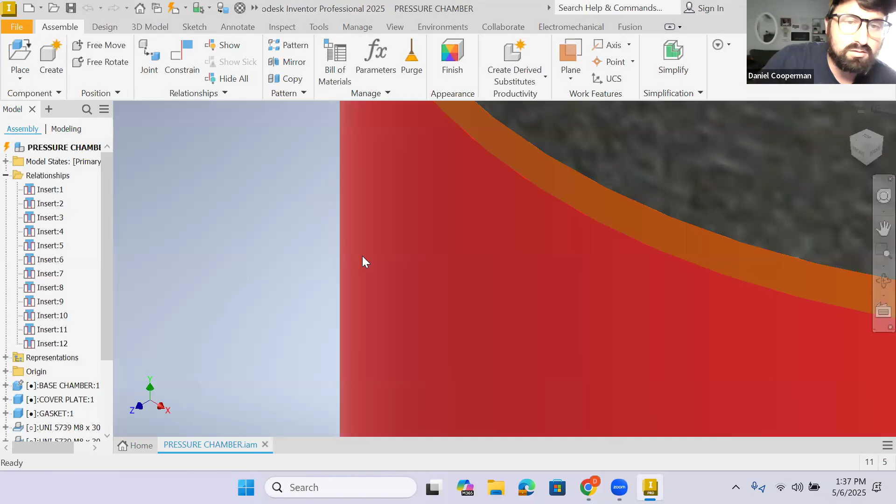Last class we finished the assembly for our pressure chamber. To review from last week, we had our base chamber part, our gasket, and our cover plate. We talked about how to assemble it all together, and how to incorporate parts from the library, inserting these 8 screws. So you should have come to class today with the pressure chamber assembly all put together. Today we're going to bring this to its conclusion and talk about how it needs to be submitted. So we're done with this assembly.

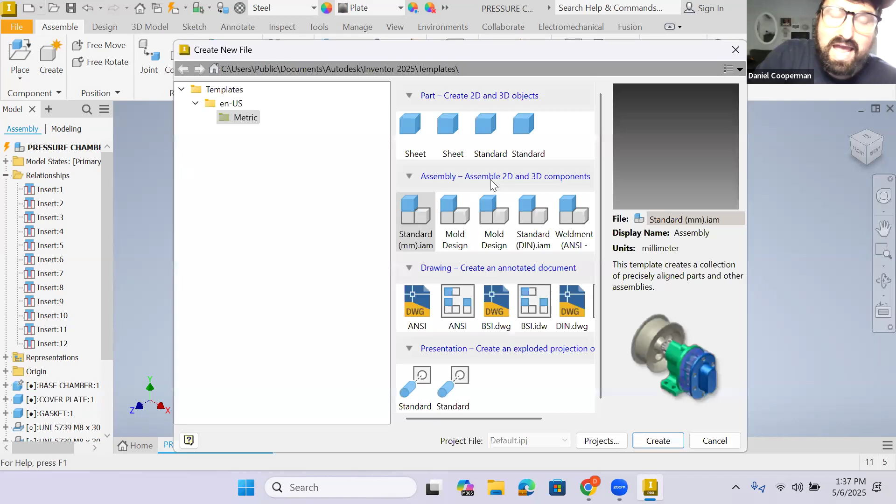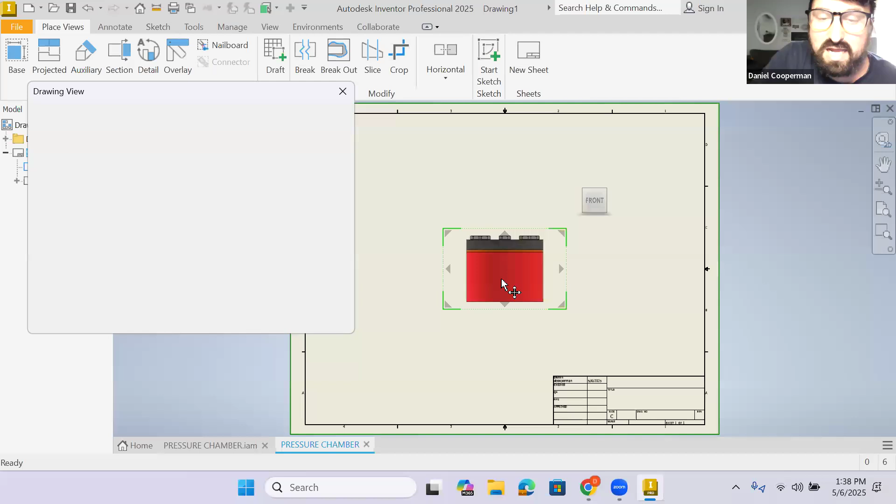Now we're going to work on how we want to have this as a deliverable. Because if I go ahead and make a drawing file, for my cover sheet we're often going to do size C. So I'm going to edit the sheet - size D is the default, make it size C. And then if I incorporate the assembly over here, the problem with an assembly shown this way is you can't really see the gasket, for example. Because everything is put together properly, it's a little hard to make out individual parts to see how they interact in a more physical sense.

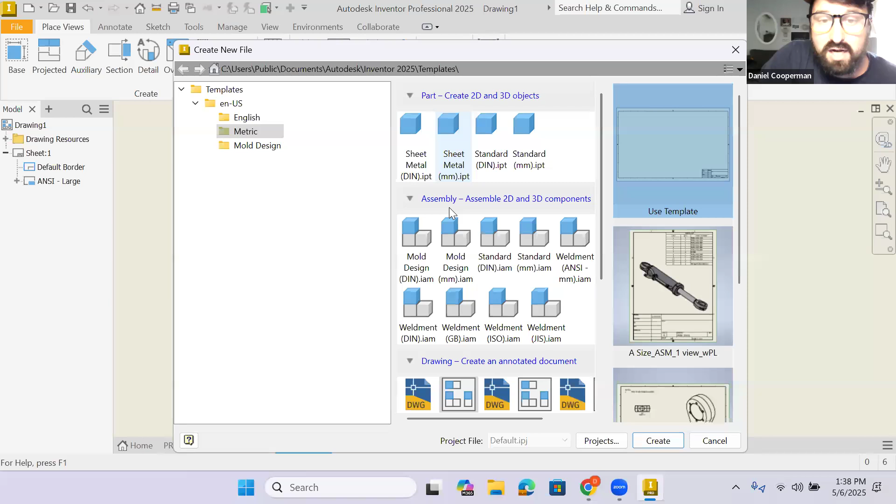So we are going to have another type of file. Let's go ahead and do File, New. We've done parts, we've done assemblies, we've done drawings - the only thing left is a presentation file. A presentation file takes an assembly and creates what's called an exploded view. An exploded view, if you're not familiar with the term, is when you take an assembly and show the parts separated from where they normally are to give you an idea of how it comes together.

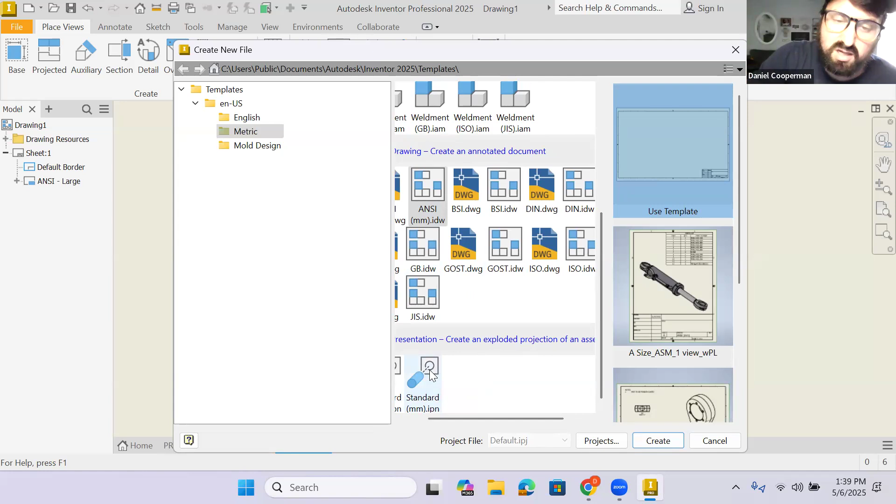So we're opening up a presentation file. Immediately it will prompt you to say, okay, what assembly do you want to create an exploded view of? For us, that's going to be the pressure chamber assembly that we just did, like this.

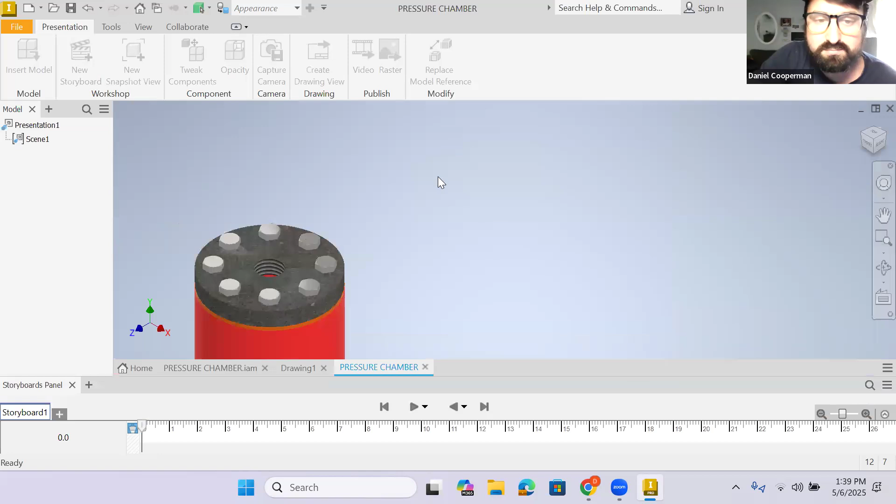All we're doing is pulling the parts apart. To do that, we're going to look at this function called tweak components.

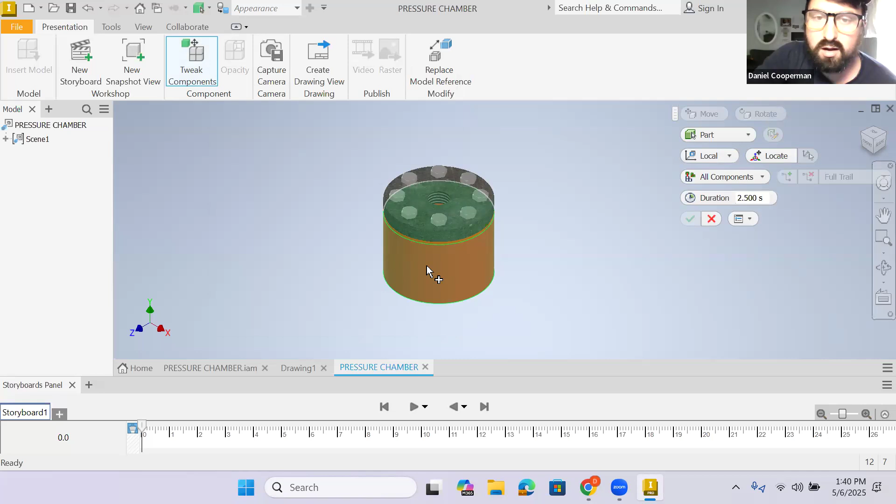Here's how it works. It's pretty simple, just click on the part or parts you want to pull away. I'm just going to do the bottom one for now, and I might have to adjust these. You have your 3 dimensions, your X, Y, and Z plane. I'm going to click on this right here and drag it where I want it to be.

It gives you the value, so you can specify, maybe negative 100. And now it just shows you how the base chamber interacts with the other parts, but it's pulling it separately so you can see it in more detail.

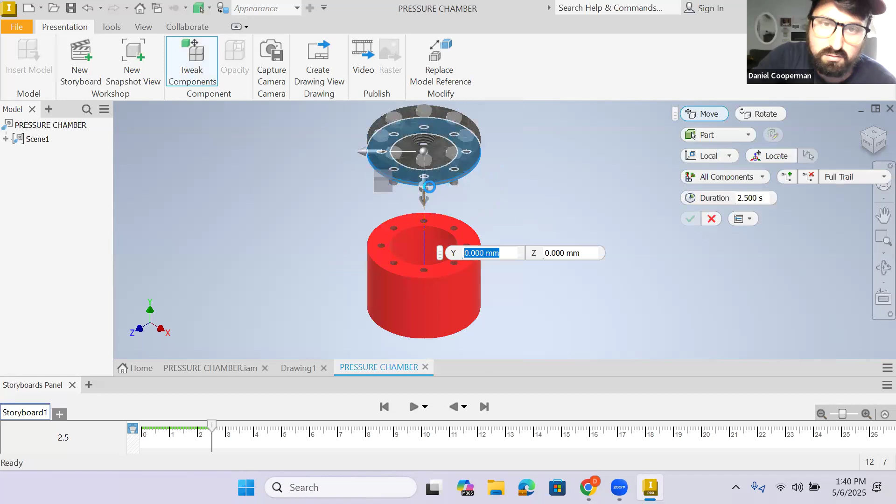We're going to do that again for the gasket. I'm having a little trouble grabbing my axis, so I'm just going to do it from here. 50, and maybe I'll make that like... just make it look good. It's okay if it covers it a little bit. I think that looks good to me.

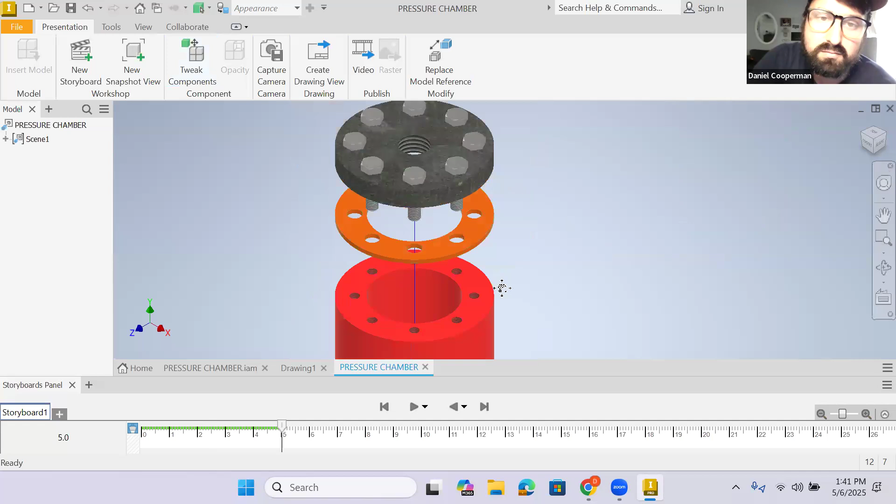Tweak components, now I'm going to move the top part. You know what, let me do the other parts first. You're just going to do this a few times.

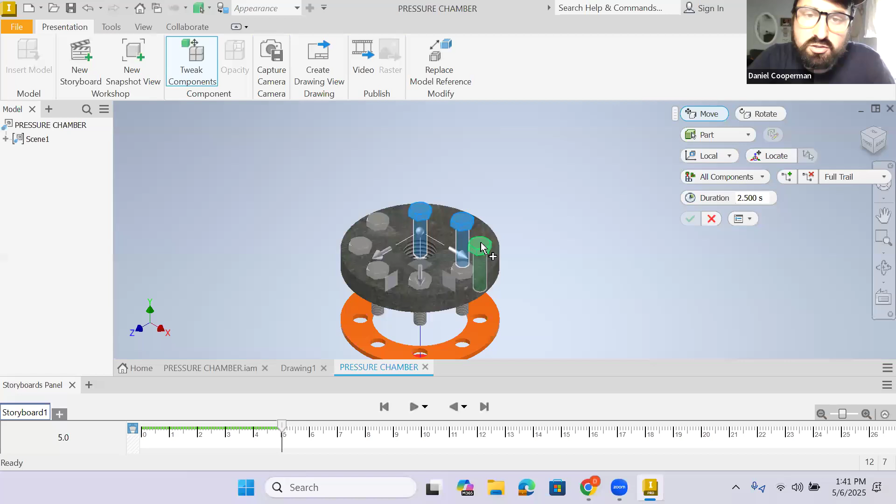Now I'm tweaking the bolts. If you want to do multiple, you just have to hold down shift - 2, 3, 4, 5, 6, 7, 8. And I'm going to pull that up like so.

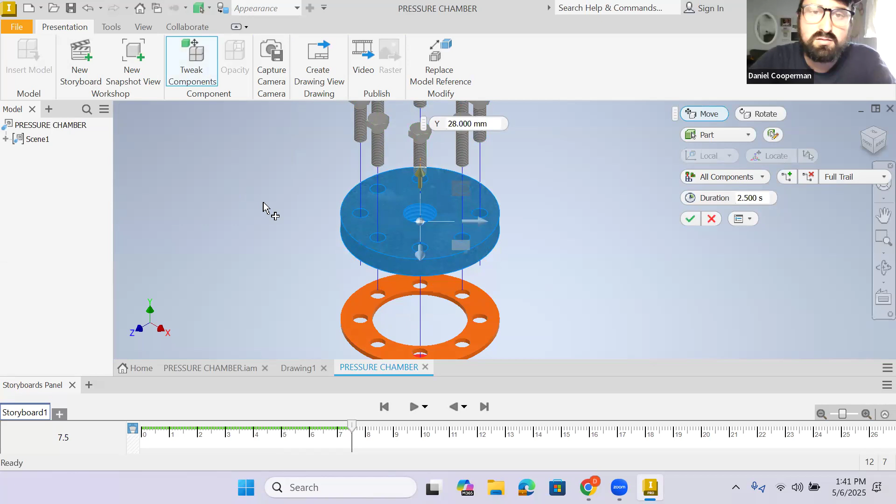Finally, I think it's better to have this be going up a little bit. Good enough. Oh, did that not work? For some reason my last one didn't work. Okay.

Perfect, so now we have an exploded view. Again, the point here is you can see much more detail - you can see each part with much more detail, and you see how they come together.

So we're going to do File, Save As, call it whatever you want - pressure chamber presentation. You can call it pressure chamber again because it says it's a different type of thing. And we'll leave it there.

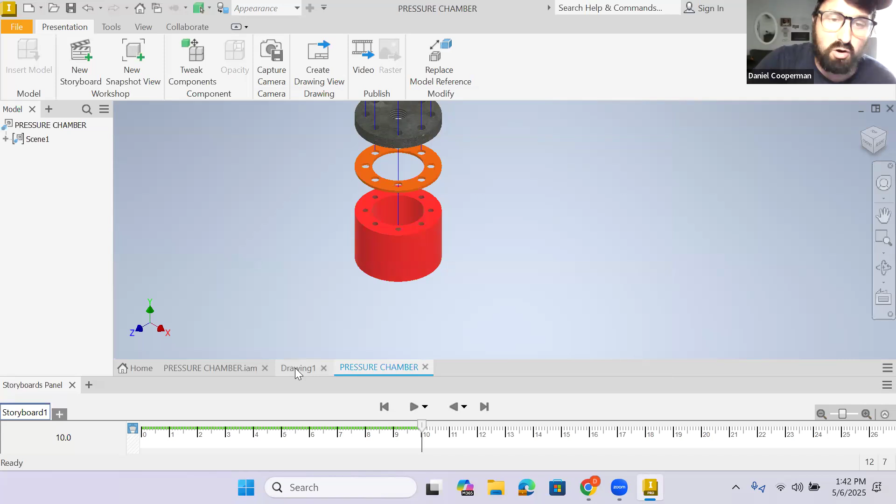Now we're going to go on to how you're actually submitting this assignment. So we are going to have a drawing file, and the base is going to be... let me see if I can grab the other one. Yeah, so this is going to be your base, your presentation file.

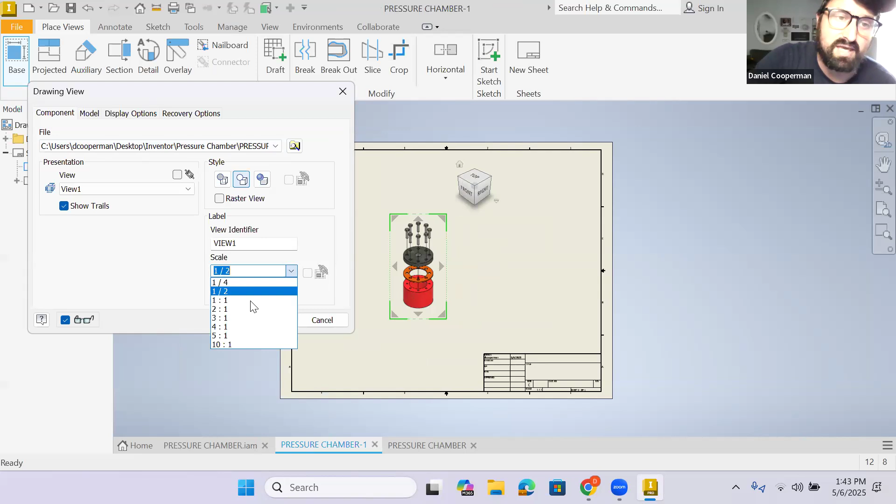I think a 1-to-1 is probably pretty good, maybe a little bit bigger. I'm going to do 1.2. Yeah, it looks good to me. 1.2 looks pretty good.

And I actually want that to be shaded, so I'm going to hit escape, go back into here, and then change the style to shaded because I want to see the pretty colors - I like pretty colors.

Then what else do we need? We need a parts list. So under annotate, we're going to go to a parts list. Parts list of what? Of this. Hit OK, put it in the corner.

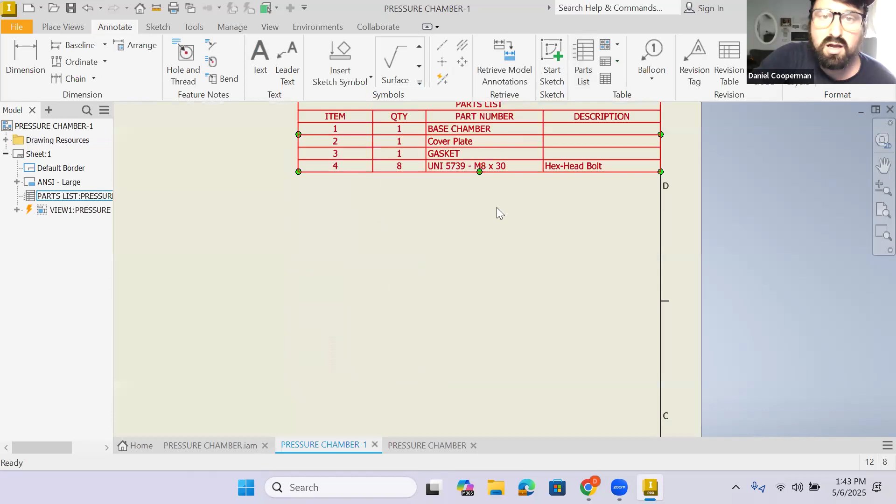Ignore that error message. Then you zoom in over here. You can see your item, your quantity - it already defaulted to the information about the bolt.

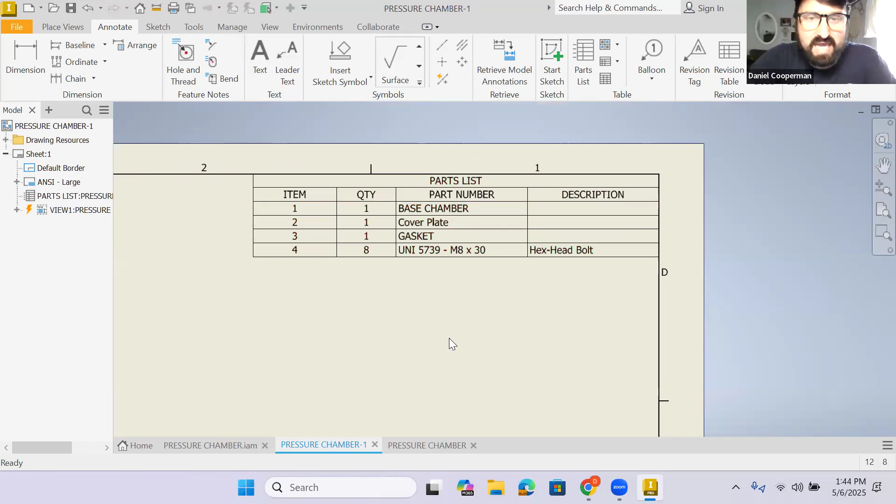So we need to edit this parts list because we want to include the material. To edit a parts list, hit escape if you're in something, right click, edit parts list. In the top left, you can do the column chooser, find the available column, and I'm going to add material, and maybe move that above description.

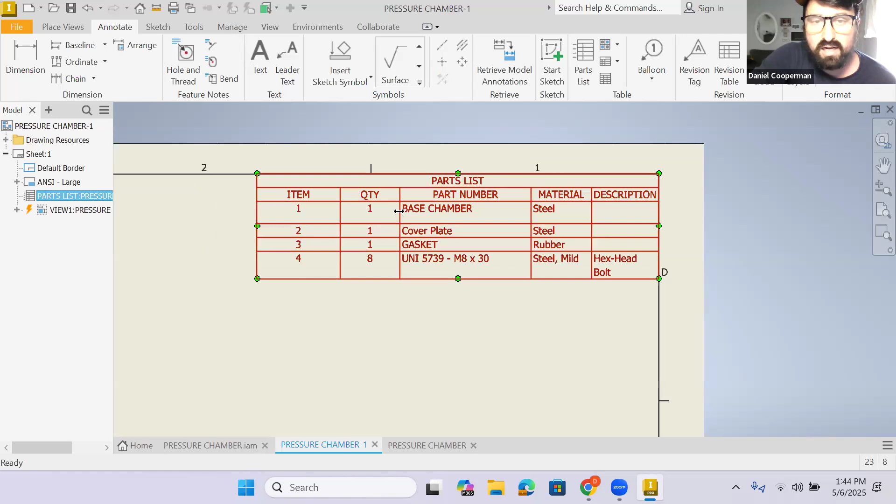That's good, I like it cleaned up a little bit. I don't want things on multiple lines like this is - I want all the columns and all the rows to be the same width or height. So I'm going to keep it like that, maybe tighten it up a little bit.

Okay, we have to add balloons as well. So we have right click, continue.

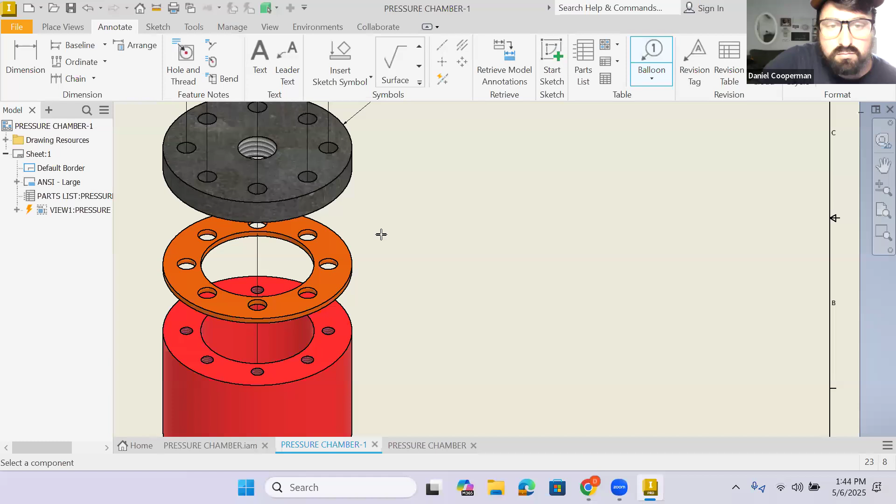And then the only other thing you would need to do is your title block. So once you have your cover sheet done, you're going to go to, as usual, File, Export, PDF, and you're going to make that.

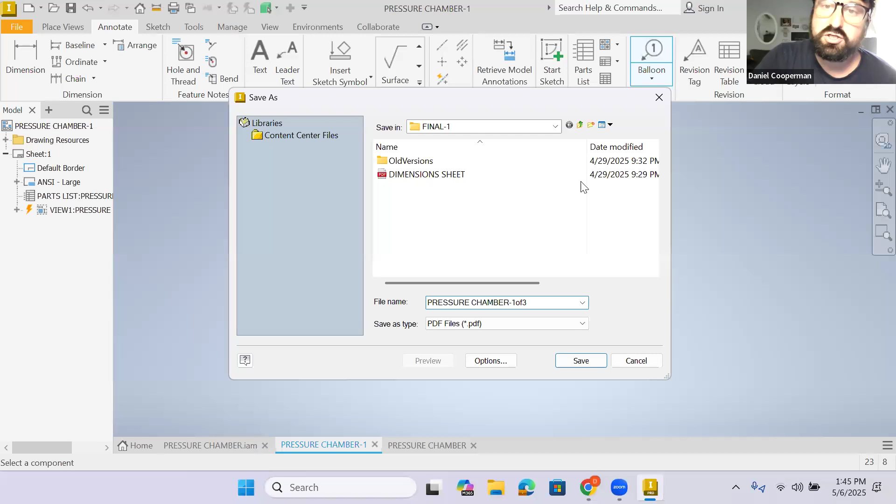You might want to call this 1 of 3, because we're actually going to have 3 PDF submissions here. So pressure chamber 1 of 3 would be a good name for the first one, and that's going to be your first submission. Now, mind you, this is very, very similar to how your final will be submitted.

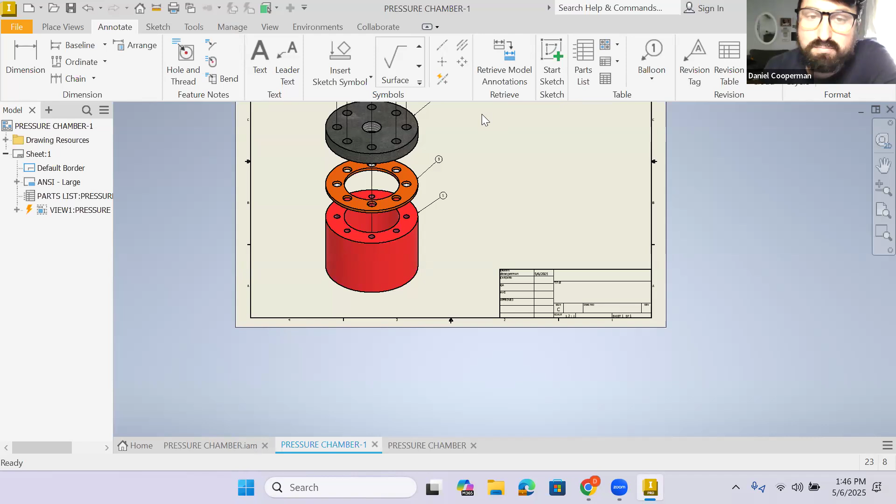So for the rocker assembly, the one with the gear links and everything, the submission for that was just the assembly on a cover sheet with the parts list and the balloons. Now, for this project and your final, you are going to submit a cover sheet like this, and you are going to have each of the individual parts put on a separate drawing file, properly dimensioned.

So that's what we're going to do now. We have 3 parts here. We are now going to create separate drawing files for each of them, and we're going to properly dimension them on a size A piece of paper.

Now, you do not have to dimension the hexagon bolt because that's a standard piece.

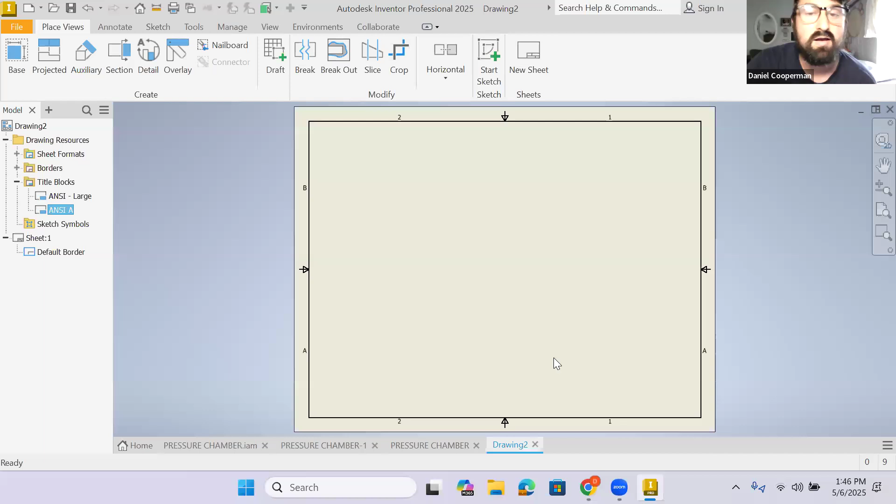So we're going to go to new, we're going to do a new drawing file. And this one is going to be a size A. So when we're doing size A, we have to have the smaller title block. Go ahead and insert the smaller title block and properly fill it in. You do have to properly fill it in.

And we are going to now insert our 3 parts, one at a time. So we'll do the gasket and the cover plate first.

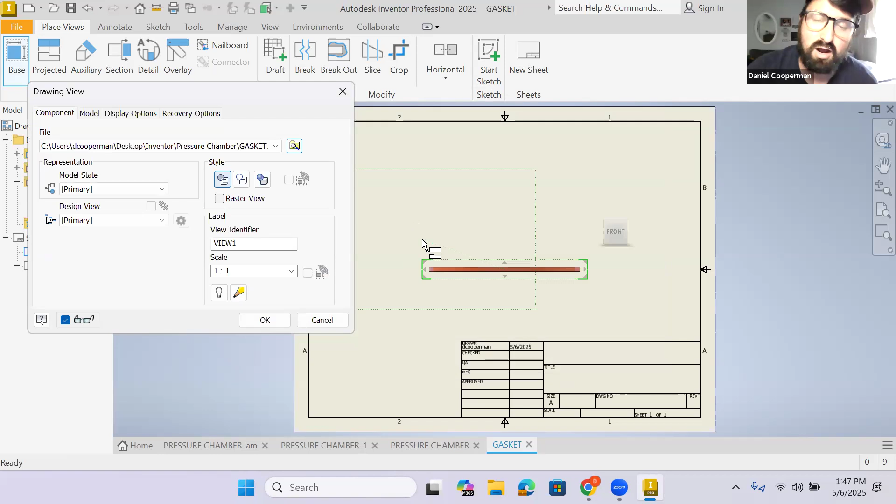Okay, so when we're doing this, we're gonna obviously insert it. Now for this one, maybe I'll make it a scale 1:1. How many views do we need?

Someone besides Anthony, how many views do you think I need to properly describe, or should I include to properly describe this gasket? You can use the chat too if you're an awkward person who doesn't know how to talk. How many views do we need? 3 views is our guess.

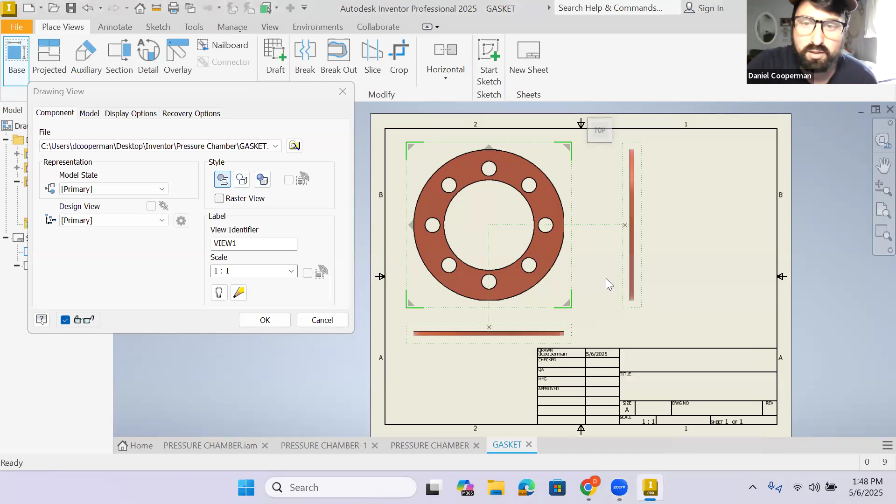Well, if we did 3 views, that's what we're going to have. So how many views do we think we need? I'd argue 2. You'd argue 2. I'm actually going to argue that you only need 1.

Now, you would have to have a piece of text that would specify the thickness here, but you can really describe it all on one view. Like, what is this side view really contributing to information purposes? Just the thickness. And this, I think, as Diego pointed out correctly, this view and this view are the same exact view. There's nothing that one is off from the other. But I'm arguing that actually neither of them are really helpful.

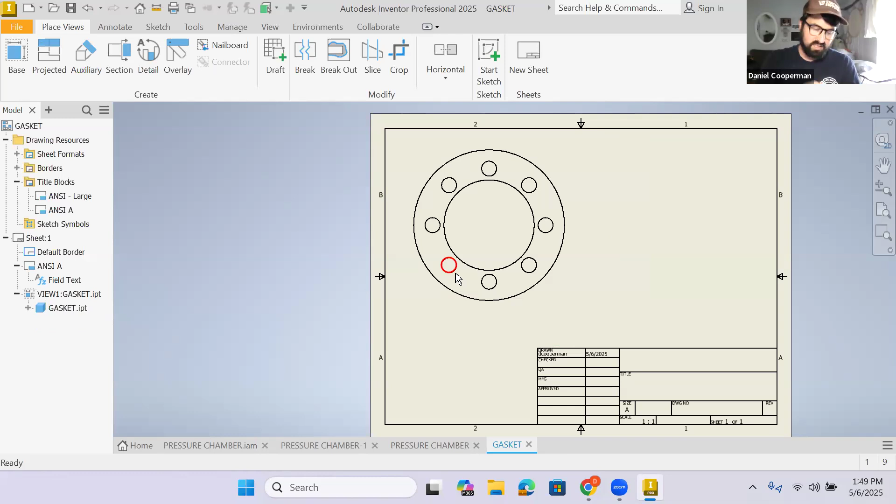So I'm going to have just this view. And for this one, we'll do it as a happy family. It's my gift to you for the last day of the semester. I'll go through everything you have to do. This was the gasket. Okay, so what dimensions do we need for the gasket?

Well, we're going to go to annotate, and we're going to have 100 right here. The inside one was 60. This right here was diameter of 10.

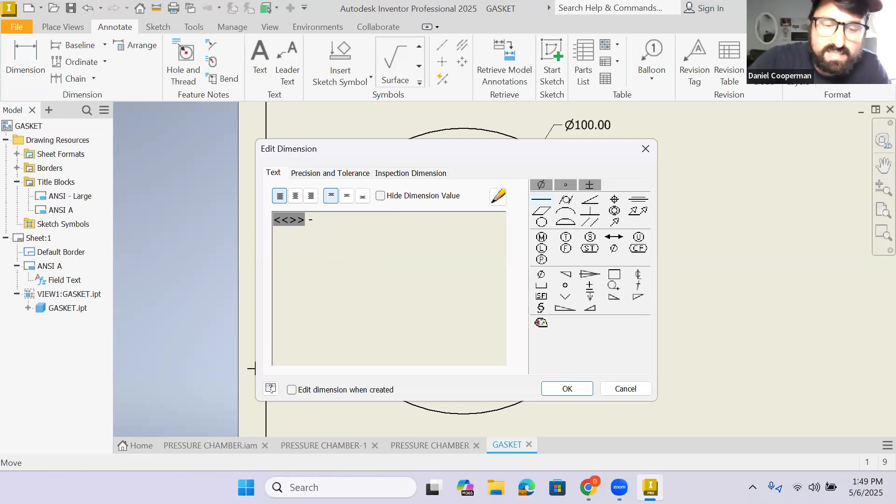And this one, not only was it diameter of 10, but we want to specify we have 1, 2, 3, 4 — we have 8 of them. So double click in there and you could say like TYP, it should be in all caps. You could say TYP. I'm going to say 8 holes, but either way, you kind of convey the message.

And I'm actually missing 1 dimension. Anyone want to let me know what dimension I'm missing? We have the inside circle, we have the outside circle, we have these circles. What dimension am I missing? The thickness. True, I am missing the thickness.

It's actually not the answer I'm baiting for right here, but that is correct also. So what, besides the thickness, what other dimension am I missing? The distance between the holes. Also a good answer, I guess there are a few.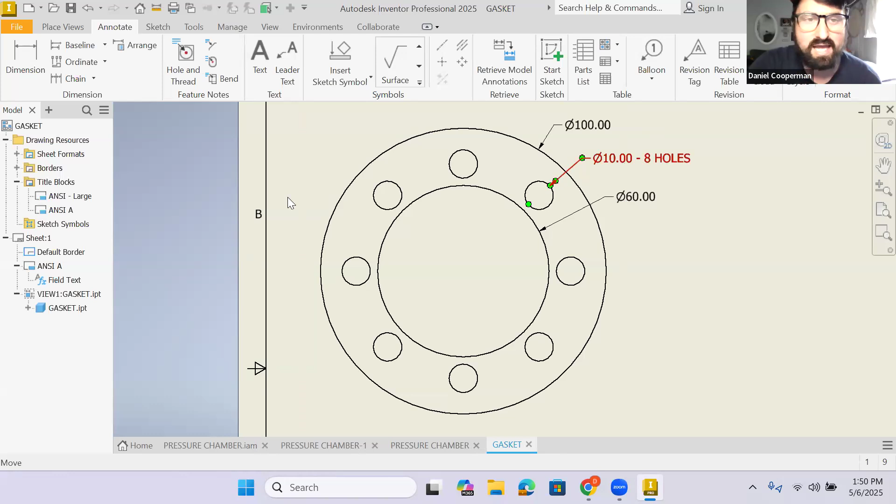So the distance between the holes, like from here to here, you could say like evenly spaced. I think it's okay to assume that, but you are actually also right there. So there's actually 1 more dimension that we are missing. So I'll just do in. What other dimension am I missing?

If I gave you this sheet and said, yo, draw this, you would not be able to. Can I chime in, or am I still banned? No, you can chime in. For lack of options, though, just let's be clear.

How far the holes are from the center? Good, I don't know how to locate this circle right here. So I need to know how far this is from the center. So in order to do that, you are going to have to add your center marks.

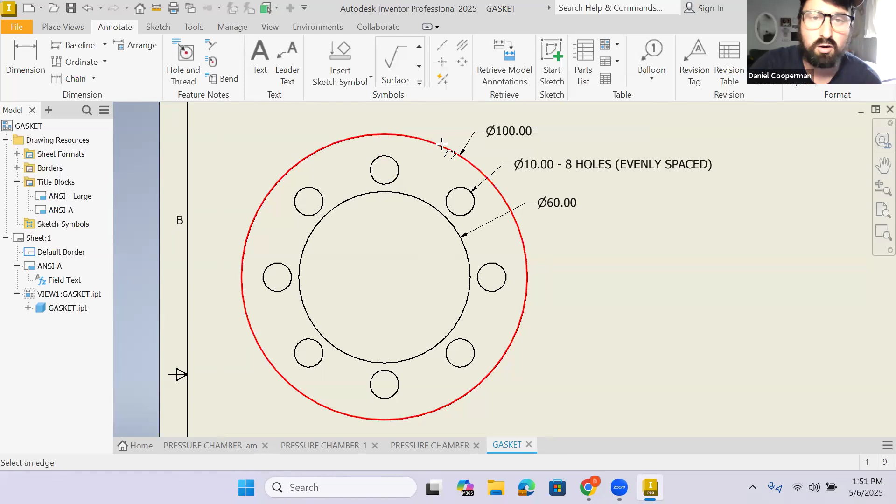So you hit your center mark. Boom. And if you hit center mark for all these little guys over here, it's actually not really ideal, because what you're doing is you're having everything be X and Y. So when you have a bunch of circles in a pattern right here, this is something that's new.

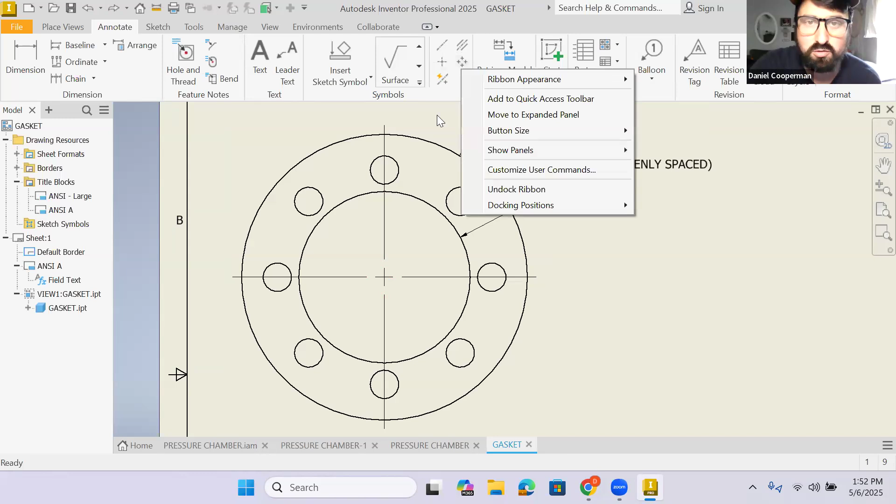Over here under annotate, we've done center mark, we've done center line. We have not done centered pattern. And you use a centered pattern when you have a bunch of circles in a circular pattern.

So I'm going to hit centered pattern, and then look in the bottom left. What does it say? It says select center of circle pattern. Okay, well, they're all here, the center of that is right here. So click, now click on your location. Boom, boom, boom, boom. And look at what it's creating.

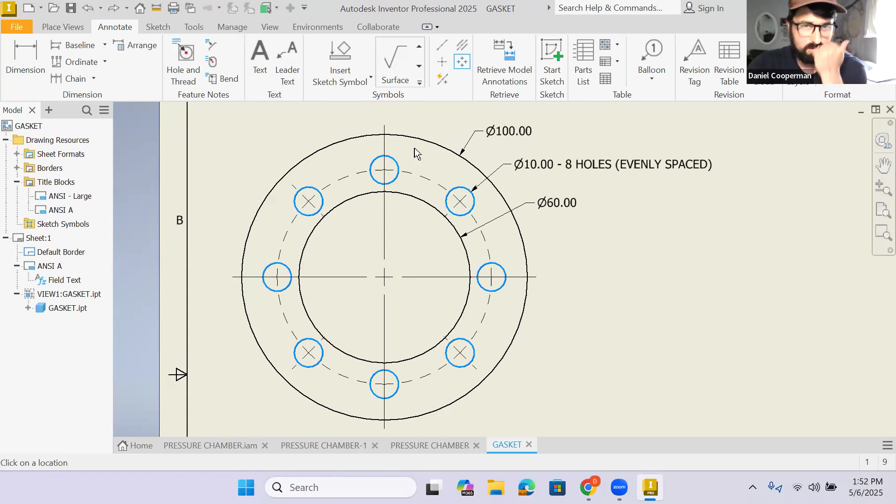Right click and then create. And now you just created a very nice center mark with a circular pattern. So now, when I hit dimension, I could dimension to this right here and specify that those are all centered on a 75 diameter hole or circle.

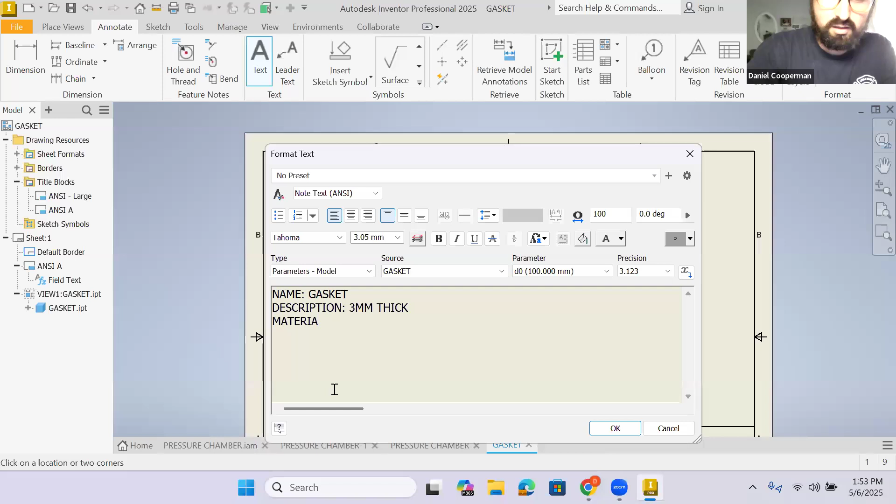Then, like Jesse said, we need to have some text. So we'll call it like this. Again, you should always be in caps. Name, gasket, description, doesn't really matter. 3 millimeters thick. Material, rubber. You can change the height if you want.

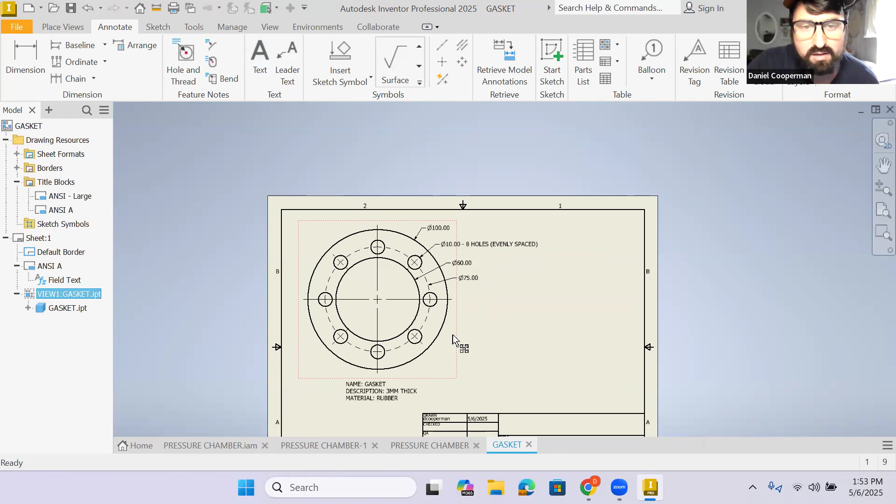So that's your first sheet. Again, you have to have your title block properly done for every sheet. But I think that we can actually fit more than one part on this piece of paper. So if I go ahead and made that scale smaller, instead of 1:1, I made it half. That looks still pretty good.

Now I do have to clean this up a bit. But it's still not so tight that it doesn't work for me. So I think that looks pretty good still. I'm going to go ahead and for this page, I'm going to have 2 dimensioned parts on the same drawing file. So now I'm going to go back for place view and add another base view.

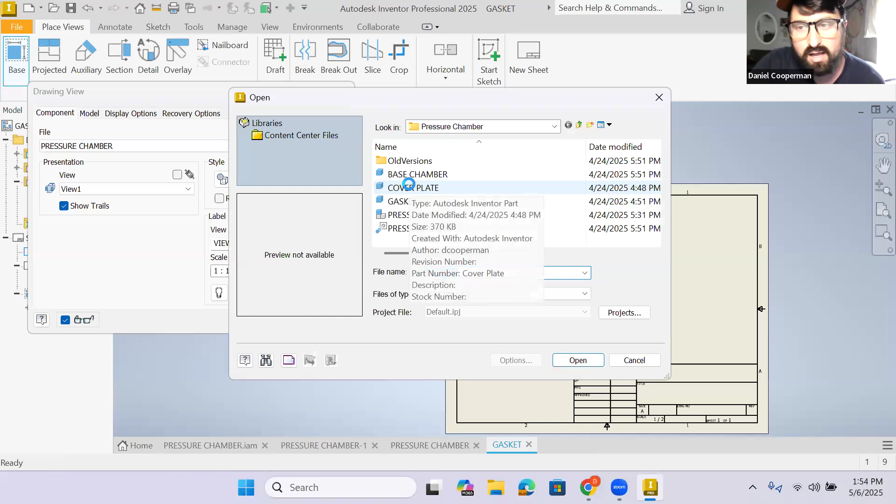And this time I'm going to do the cover plate, and then the base chamber by itself. So now I'm going to do the cover plate. And then I'm going to add my center mark. I'm going to do that centered pattern again.

3. Why isn't it? Oh, I did it wrong. Look, perfect example. When I hit center pattern, the first thing I clicked was the part, but the first thing you have to click after you hit center pattern is actually the center of the pattern. Click and then begin your pattern. 5, 6, 7.

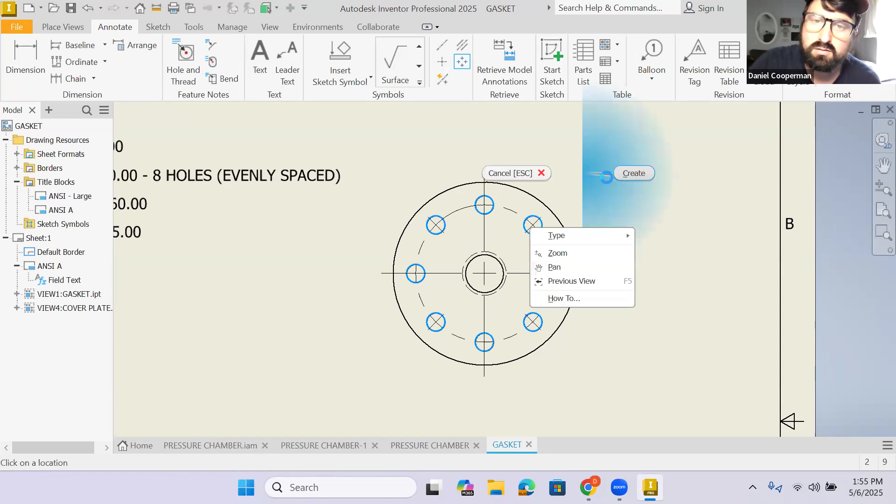Dimension. I'll do the outside one. Do that one. And now we have to do the inside one too.

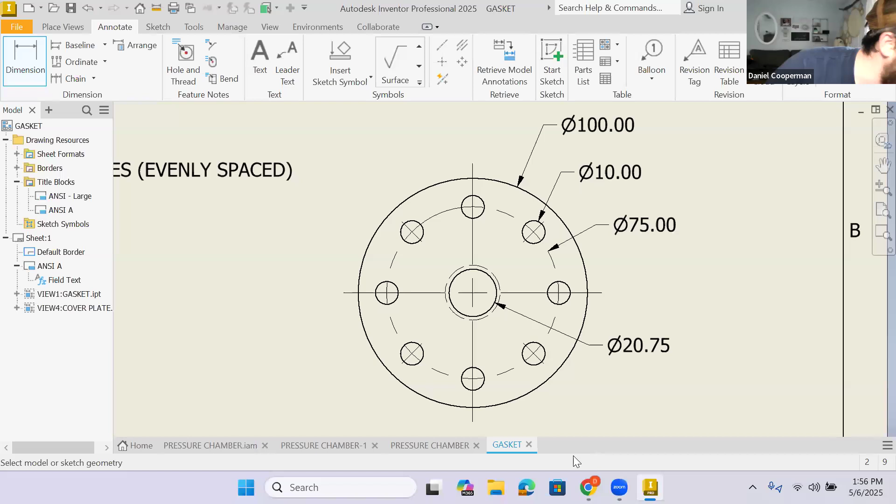Now, why is it telling me that my diameter is 20.75? That's a little weird, right? Well, it's because we did the screws, right? So we actually have a screw right here. Now the screw was an M24 by 3. And what you see here when you zoom in, the reason why you have a solid and then a dashed is it's kind of showing you the thickness of the threads itself.

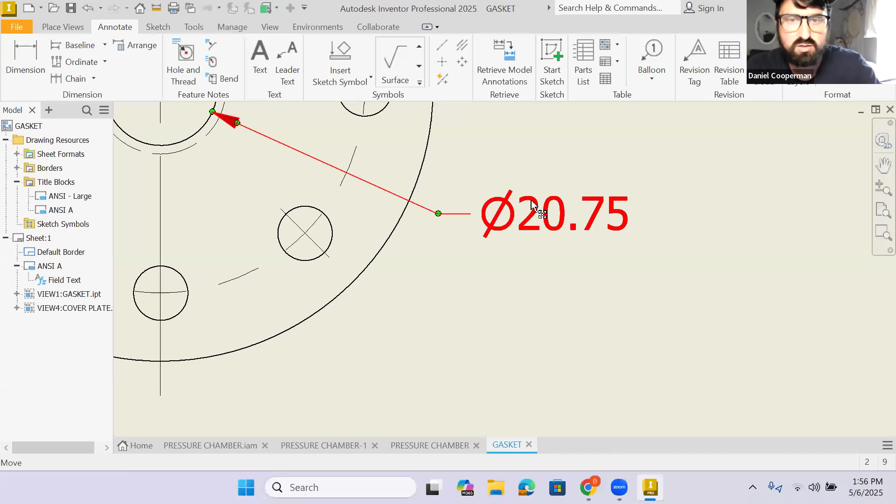So the outside thread is actually where your 24 is coming from, but the inside of the thread is 20.75. But I don't really want either of those. I want it to tell me in my dimension that we have an M24 by 3 screw. So once you put your dimension here, double click it, and I'm going to start typing M24 by 3. But the problem is that it still has that 20.75. I don't want to see that anymore. I want it gone. I want to override that. So to get rid of it, you hit right here, hide dimension value, and then you can just have it say M24 by 3.

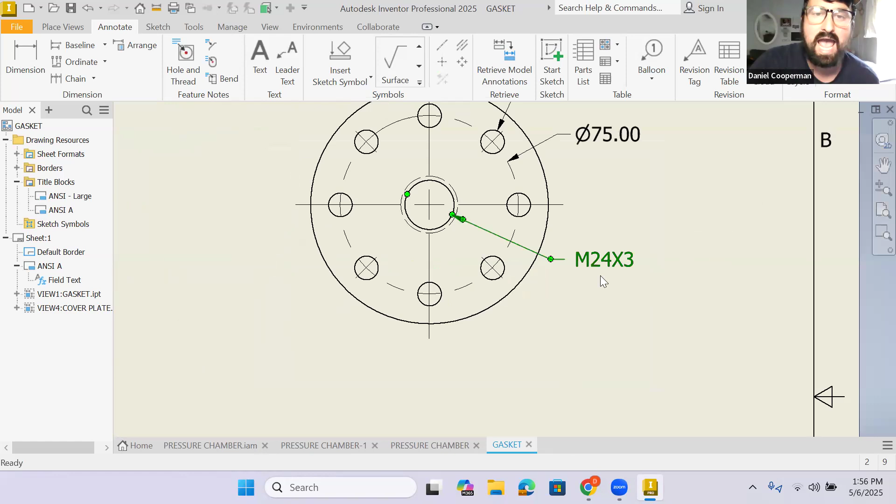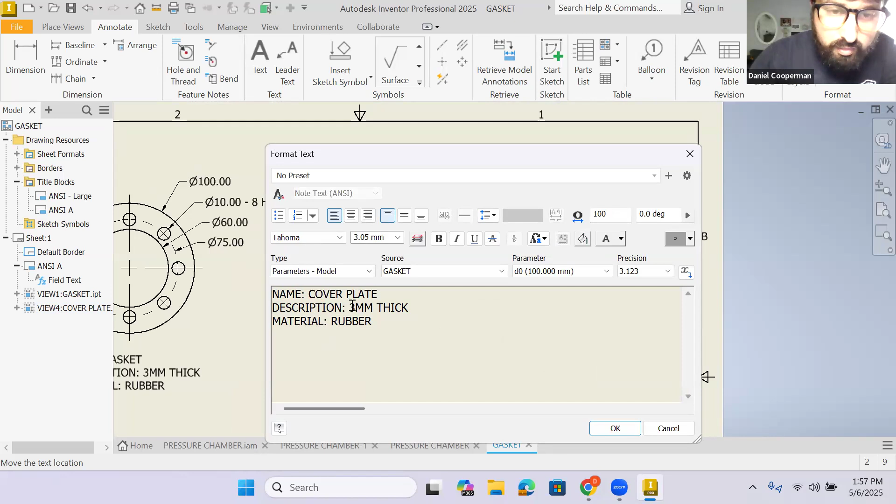I'm going to copy this over. So Control V, Control V, and then I'll change up what it says. This was a cover plate, 13 millimeters thick, and this is made out of steel.

And let's look, we have 100. Oh yeah, the only other thing is I think that we should say 8 holes evenly spaced over here as well. That was the only thing I forgot. And let's see if we can clean that up a little bit. Maybe I'll make that over 2 lines.

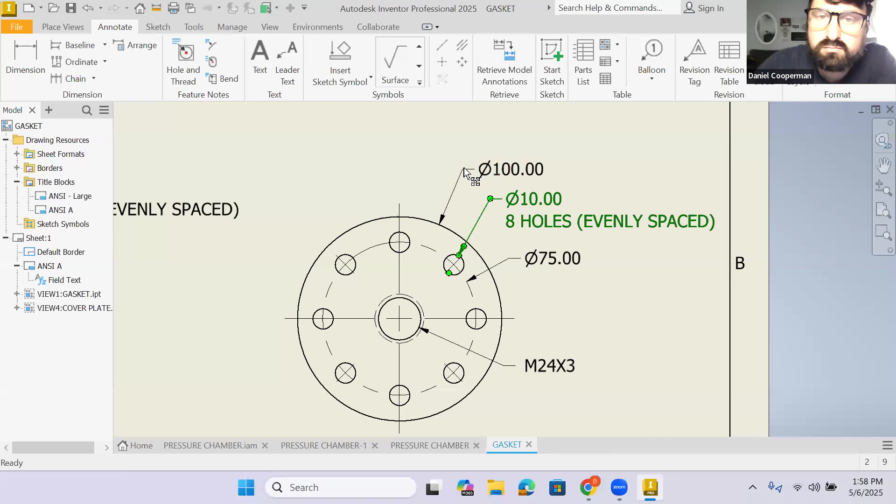Okay, so now we have 2 of our 3 parts dimensioned. Again, this is a size A. Don't forget to do the title block. That has to be done for every single page. And we're going to do File, Export, and we'll call this 2 of 3.

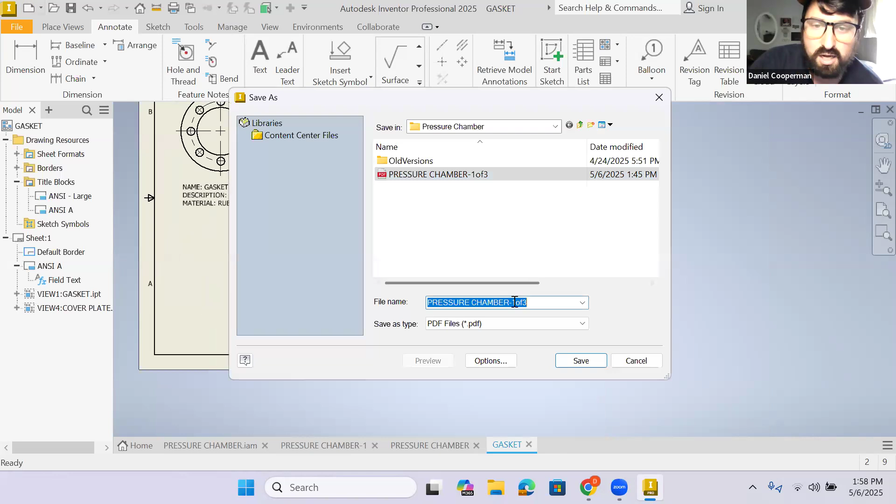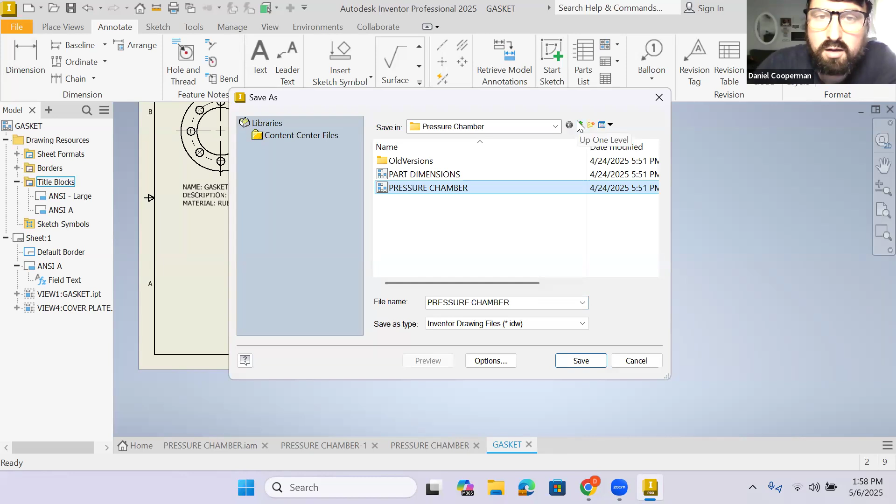And we can do a file save as if you want to make a copy of this, because at this point you should have your title block already done. So if you do a file save as and rename it, then it'll be there ready.

Why is it not opening? What did I do wrong? File, save as. Oh, sorry, you shouldn't do it that way. Wait, did I overwrite it? Give me 1 second, I lost which one. There we go, okay.

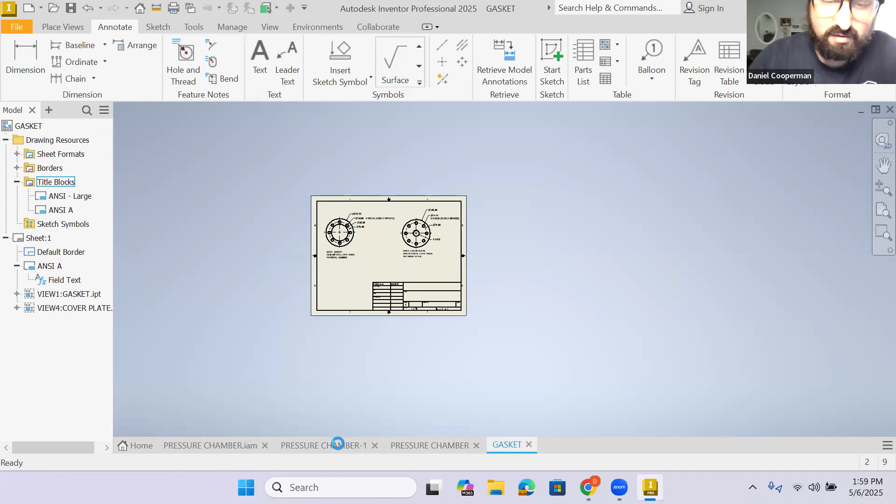Pressure chamber. I didn't, okay. My issue with that, my hesitation right there was I never actually saved the drawing file of the second one. So we have this one right here. Yeah, so my issue, guys, was I didn't save the drawing file itself. I only saved the PDF. So pressure chamber 1 of 3 is the first page.

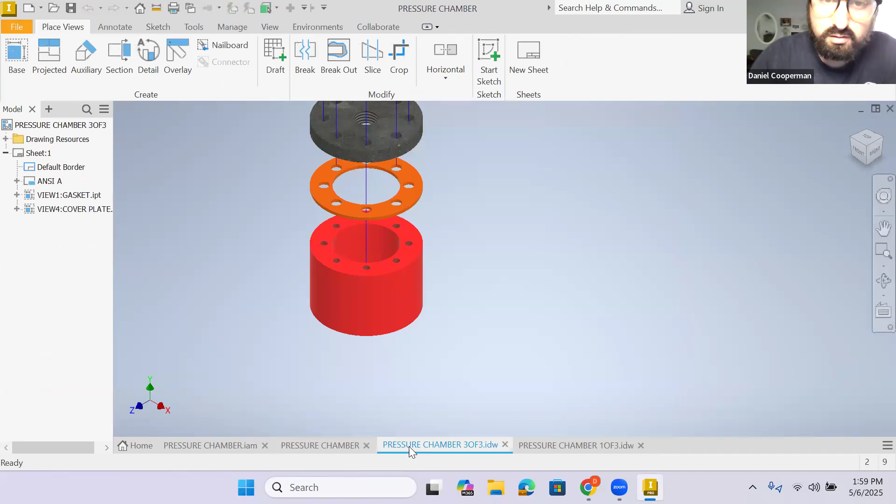And then this one was 2 of 3, I have to rename that. Okay, so then 2 of 3. Okay, and then we have to open 3 of 3. And this is the one that we're going to delete what we have over here.

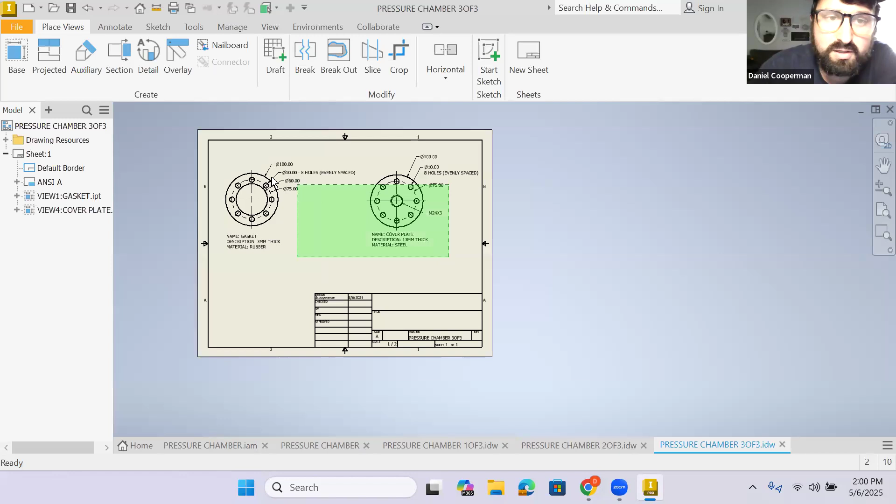And one of these texts, again, your title block would be good. Okay, so hopefully, any questions on what I just did?

Do you have to put both names in the title block? How would you put both names into the title block? You just type it in, no problem. Your description could just be like dimensioned parts. Good question, Diego. His question was, we're so used to calling this the name of the part, but now we have two, what do we call it? This is like the title of the page, not necessarily the title of the part. So here you can just say, dimension parts 1 of 2, dimension parts 2 of 2, because it would be redundant, like Diego pointed out, to have it be the same for both.

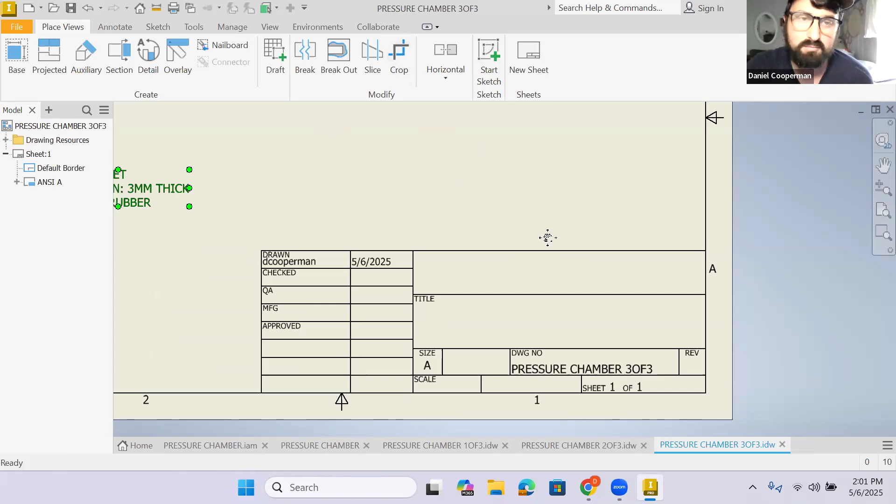Okay, so now we're going to do the base chamber. So the base chamber over here. And I'm going to start with this view right here.

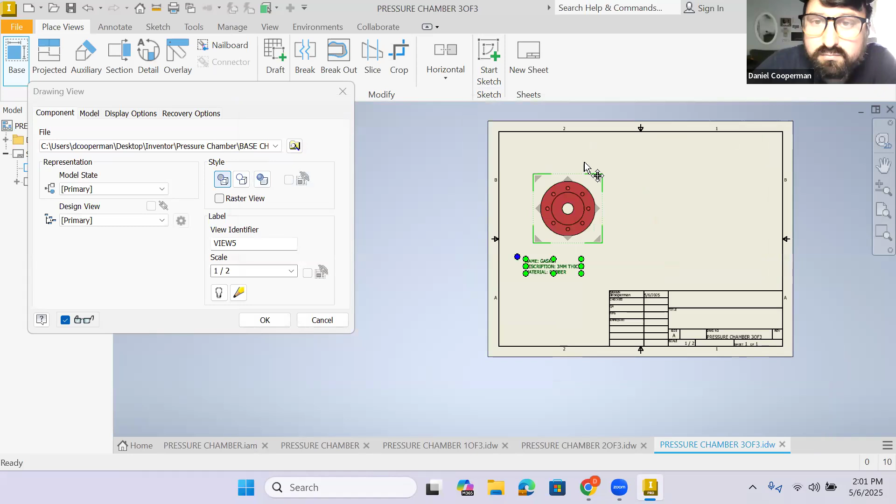I think that a section view is going to be the best way of describing the inside, so I'm going to do a section view of this right here. I'm going to go from the edge to the center, actually only to the halfway point because it's going to look better. So instead of going across, I'm going to go down.

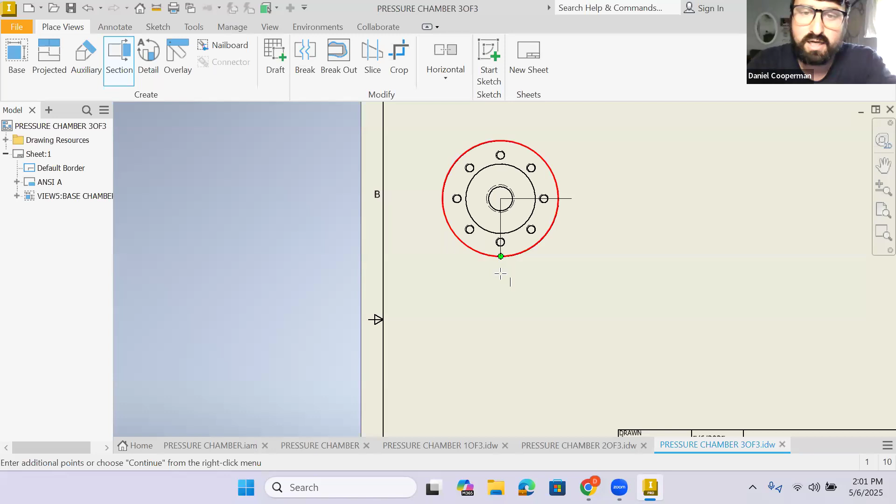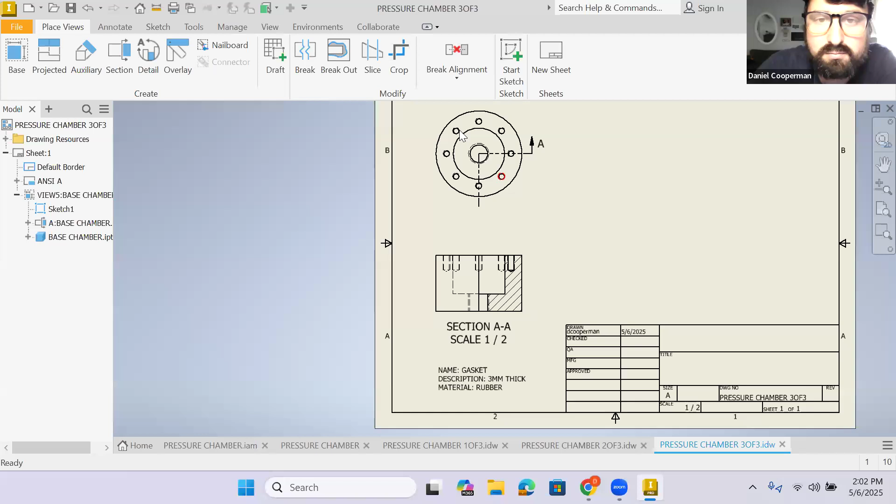Right click, continue, because then you can really see the revolve portion, so it's a little bit cleaner in my view. As you can tell here, my hidden lines got turned off, so I'm going to double click here and make sure hidden line is back on. There we go. That should be the case for all of these, make sure hidden lines are on. I don't know why it got turned off. Are my other ones... well, I guess those wouldn't have them. Anyway.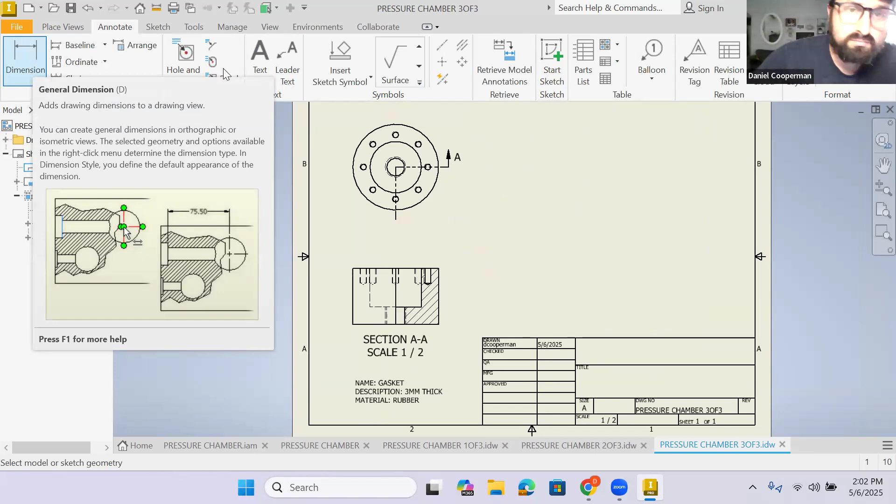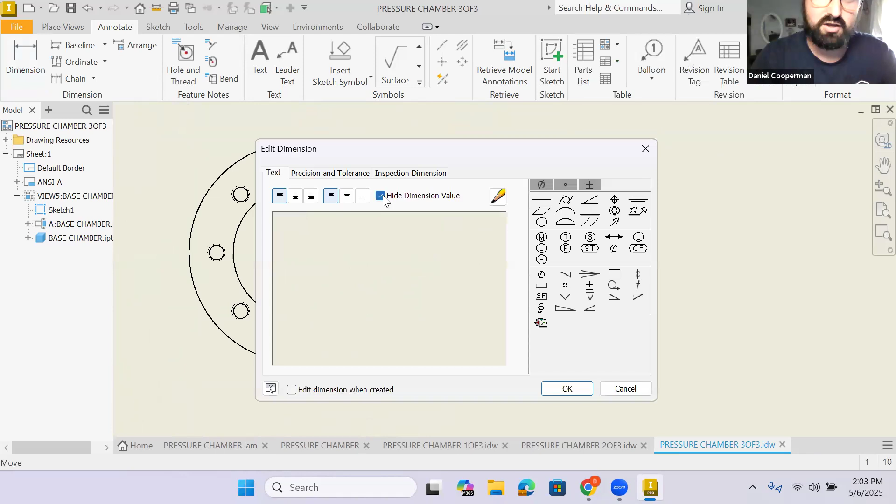Okay, so now we're going to add our dimensions here. So we have that's 75, this is 100. Over here we have, and you can have it go to either of these circles, I'll do the inside one. The default is 20.75, but we want to get rid of that, so I'm going to double click it, hide the dimension value, and say, nope, you're actually an M24 by 3.

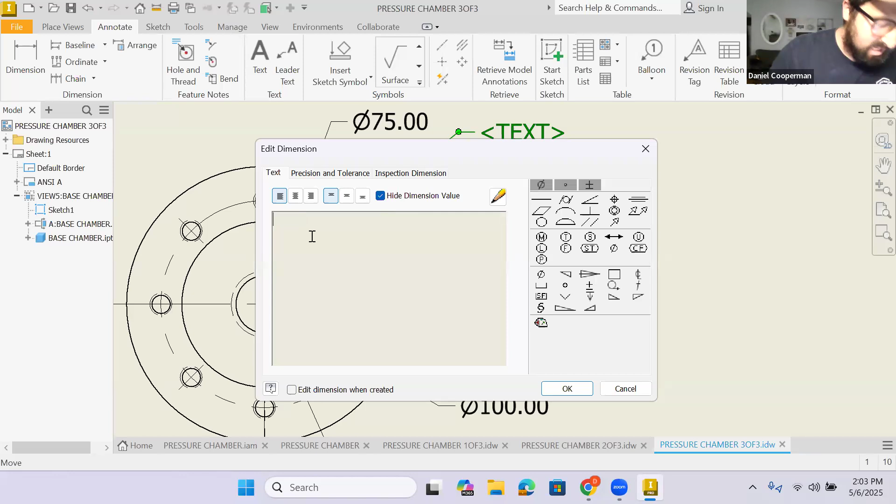We need to have our center mark right here, our centered pattern as well. Dimension to that, and we have to do this dimension as well, and that's going to be the same thing. It's going to give you the true dimension, but because we know this is the threaded one, we're going to override that and tell it we have an M8 by 1.25, and that was 17 millimeters deep, and then we have 8 holes.

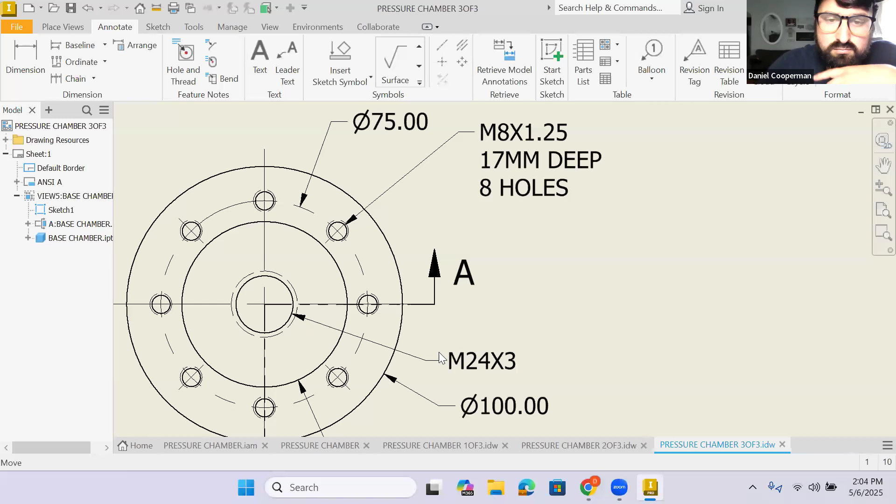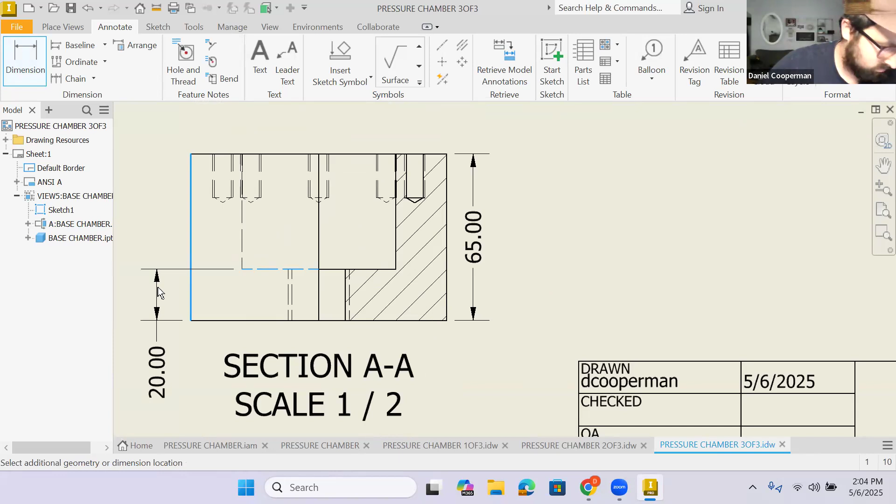Okay, clean it up if you need to. Looks good to me. And is that all the dimensions? 1, 2, 3, 4, 5. Okay, and now for the bottom, we'd have to do the height. And then I have to do this over here. And I think that's it. I think that is it.

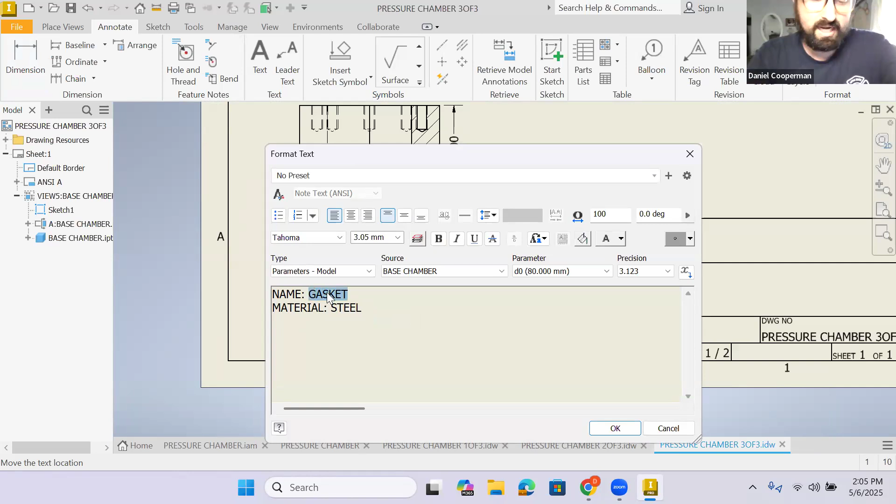Oh, then we have to change the description here, of course, or the text. Okay, so, come on. So I don't need the description anymore because I don't need to specify the thickness. So it's steel also, and the name here is base chamber.

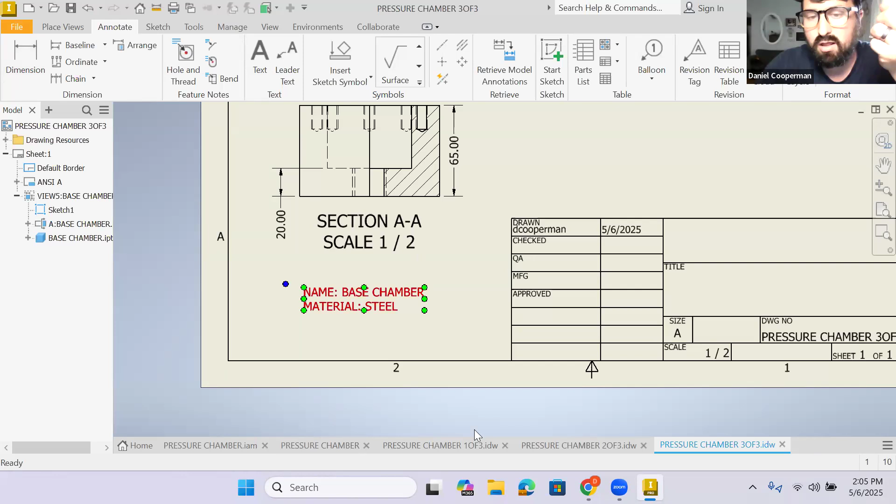And then you're going to do file, export, PDF, and this one is pressure chamber 3 of 3. And now you will have 3 PDFs: the cover page right here, the dimension sheet size A, or the cover page again was size C. The dimension sheet 1 was size A, and then dimension sheet 2 was also size A.

Now, to actually submit this, you're going to want to combine these into one PDF. So if you're not familiar with how to do this, there's a ton of free websites, so you can just go on Google and type in literally combine PDF, and there's 100 of them. The first two are great: combine PDF, and then I Love PDF.

I use these a lot because a lot of times I want to rearrange pages of a PDF, sometimes I want to combine PDFs, sometimes I want to delete pages from a PDF. So all you have to do is type in what you want to do to the PDF, like delete pages from PDF. And ilovepdf.com is a great, very free website. So I'll show you how to do it, because sometimes with these websites they're a little bit sneaky with how you click on things, so you want to make sure you click the right spot.

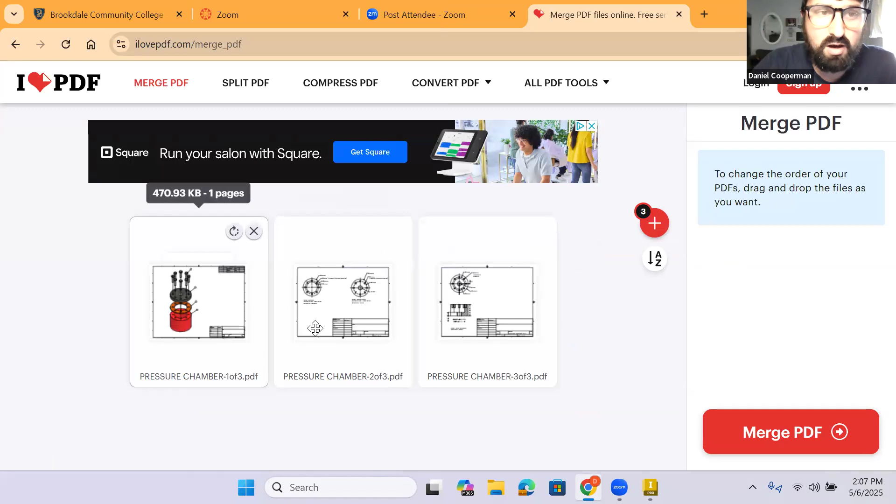So when it says merge PDF files, I'm going to click here, and then wherever you saved it, you're going to click on your 3 files here, and then we have file 1, file 2, file 3, merge PDF.

The PDFs have been merged. Hit download merged PDF, and in your downloads file you now have your sheet 1. You can see the size difference too - sheet 1, sheet 2, and sheet 3. This is the file you should be uploading for the pressure chamber.

Note the parallels between this and your final. Your final will be very, very similar.

Any questions on the pressure chamber? Of course, the videos are uploaded, so if you're doing this later, have the video open, watch me do it, pause it, then you do it, resume, watch me do it, pause, and have you do it. That's probably the best strategy. I know a lot of you like to do this on your own time, not necessarily during lab time.

Any questions on the pressure chamber before I go back to talking about your final for a bit? Give me one second.

I heard my chickens making a lot of noise, but I don't see anything out there, so I was bracing for a fox again. You have chickens? I do, I have a lot of chickens. You got ahead of the egg curve. That's where I get all that cash, the egg money from. Yeah, the egg prices. Is that why? I know, yeah - actually I caused the bird flu so I can sell more of my eggs. No.

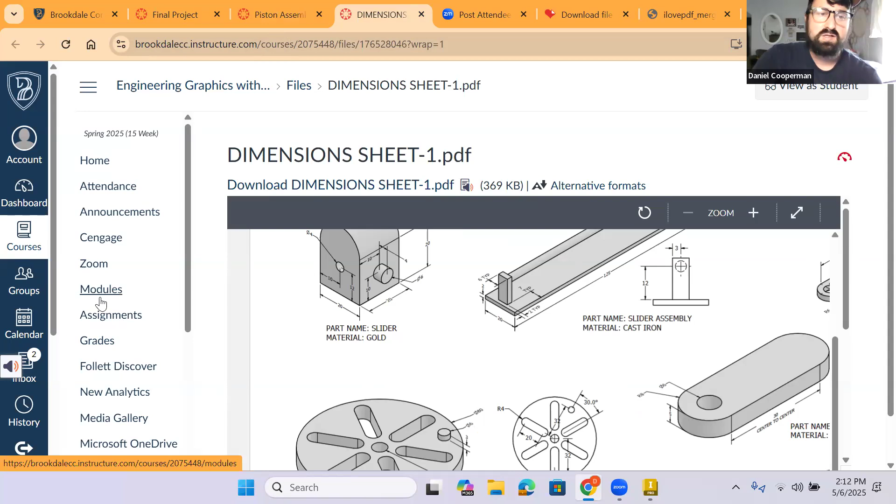I talked about this last week, but the actual assembly of the parts, where you're building it all together, is rather complicated. So again, in my infinite generosity, I created a video of myself showing you exactly how it all comes together. I threw it into the module called Handout, and it says Piston Assembly Demo. If you watch this extremely high production quality video, you will see exactly how to assemble everything once all your parts are done.

Once all your parts are done, watch that video, and that'll show you how it comes together to create it with all the proper constraints, because we've only really done the insert constraint as a family, but for this one you're going to have to use the mate constraint and then something called rigid joint. I show you how to do that in that video. Not complicated, but the video is definitely going to be needed to help show how that interacts.

All right, any questions on your final? Anything else? Because again, we don't have class next week unless you had a question in particular. So for most of you, this is probably our last time meeting for this class. So any other questions?

I'm all good, Professor, thank you for everything. Appreciate you guys, especially the three of you who keep your cameras on so I don't feel too lonely.

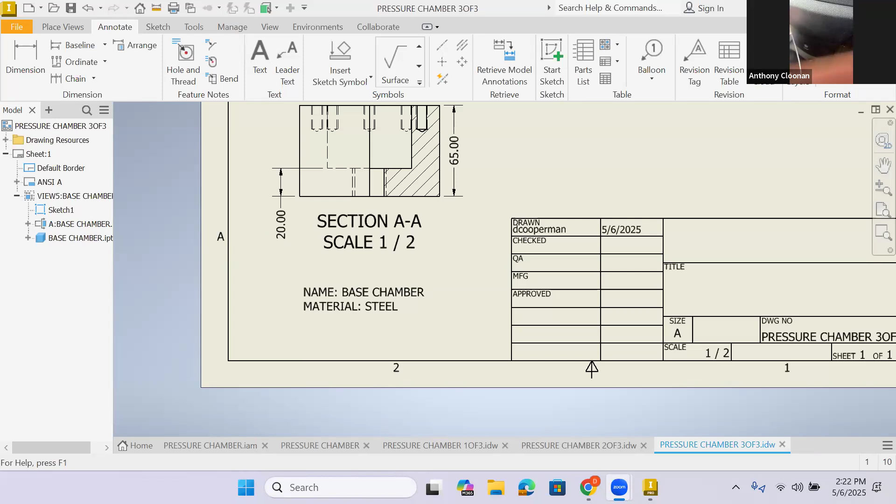I would love to share because I highly recommend it to anybody, the values of growing your own food. I think there are so many externalities that come out of gardening, more than just growing food, other skills too. It's really rewarding, just to do something and see it pay off. It's extremely rewarding, good for your brain, good for your body, and for food, I don't know how many tinfoil hats I want to bring out on a Zoom meeting.

But yeah, I've got a lot of them. You keep them in the truck. Hold on, I might have one here, I keep them in my dresser. There we go. But yeah, I have a lot of reasons why we try to minimize a lot of our conventional food consumption. We'll say, no, 5G gets through this thing.

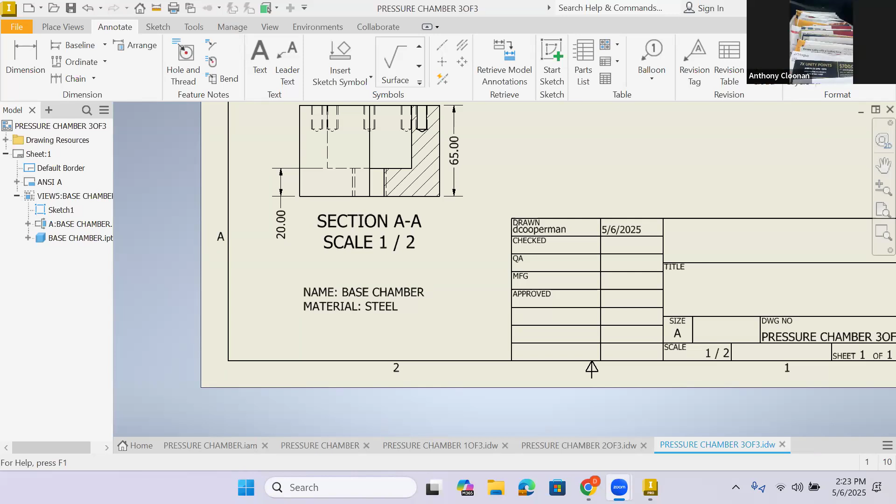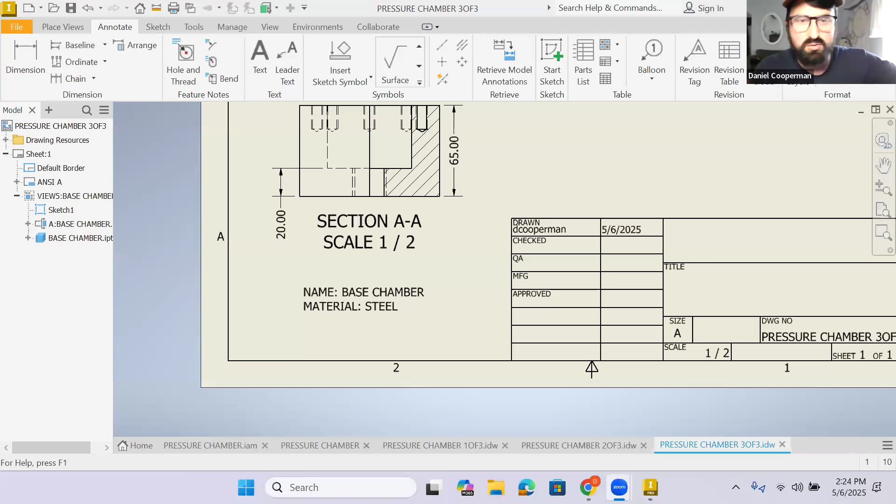It's cool, man. And once you're good at it, and it probably took me about four years to get good at it, it's not difficult. We literally plant thousands of seeds a year, and it sounds like it would take a crazy amount of time, but once you're efficient, it's really not as hard as one might think. Once your land is set up for it, a lot of the work is tending the land. You do a lot of perennials, so things come back and you don't have to think about it anymore. Pruning is just a small activity you bang out, it's not a large ordeal like planning or maintenance in the beginning. But now the hardest part is literally weeding.

That never gets... I've got that problem too. You get better at it, like I do weed cloth, I do wood chips now in certain areas. So you kind of learn to get more efficient.